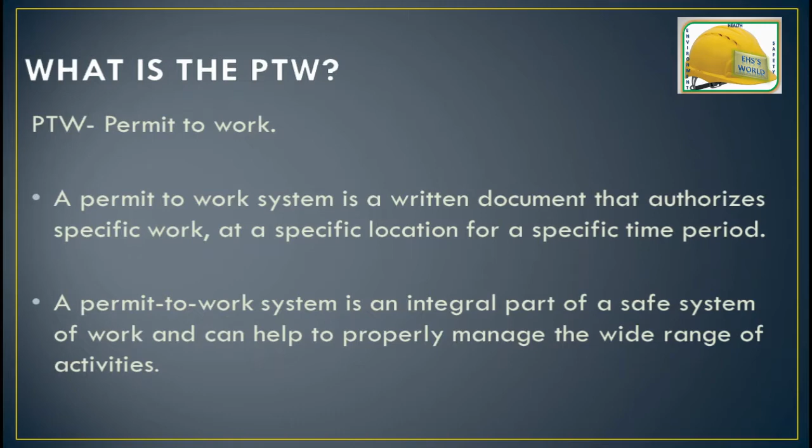Today we will cover permit to work. What is PTW? PTW stands for permit to work. A permit to work system is a written document that authorizes a specific work at a specific location for a specific time period. A permit to work system is an integral part of a safe system of work and can help to properly manage the wide range of activities.

What is PTW? So there are two parts: one is the issuing authority and the other is the receiver. The issuing authority may be the project manager, site in charge, site manager or site engineer who is responsible for the normal operations within a particular workplace or work site. And who is the receiver? The receiver is a supervisor or team leader of workmen who have to carry out the activity.

A permit to work is not simply permission to carry out a dangerous job. It is an essential part of a system which determines how that job can be carried out safely and helps communicate this to those doing the job. It should not be regarded as an easy way to eliminate hazard or reduce risk. The issue of a permit does not make a job safe by itself. That can only be achieved by those preparing for the job, those supervising the work, and those carrying it out.

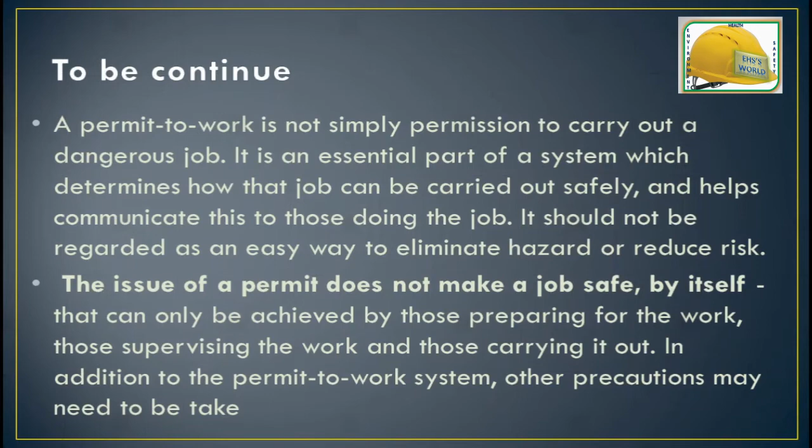In addition to the permit to work system, other precautions may need to be taken. A permit to work system is a formal recorded process used to control work which is identified as potentially hazardous. It is also a means of communication between site management, plant supervisors, and operators and those who carry out the hazardous work.

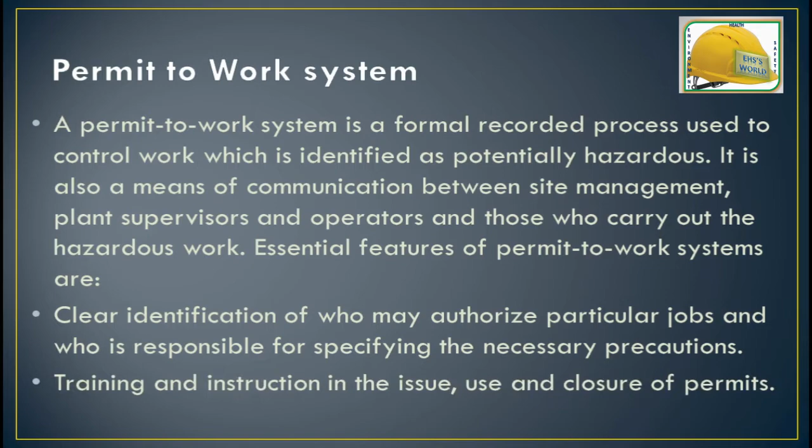Essential features of a permit to work system are clear identification of who may authorize particular jobs and who is responsible for specifying the necessary precautions, and training and instruction in the issue, use and closure of the permits.

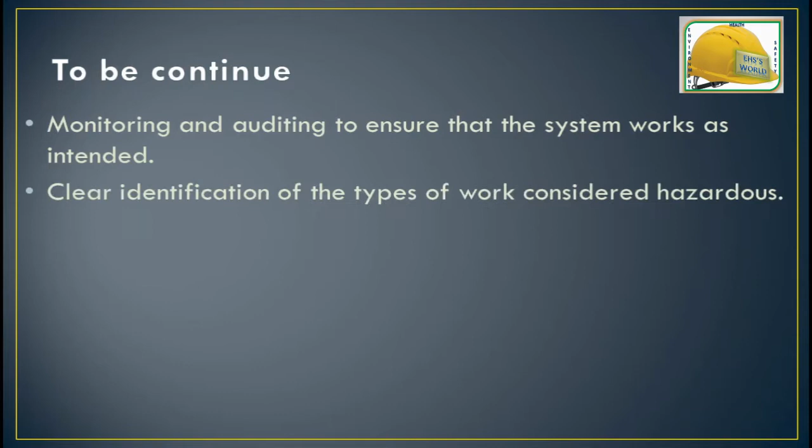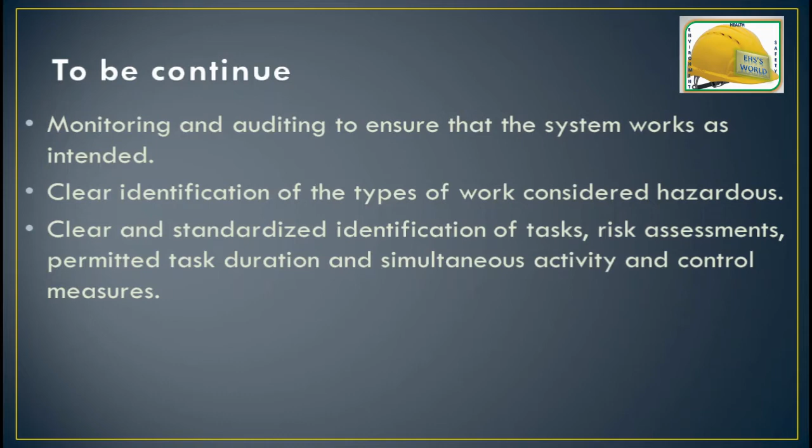Monitoring and auditing to ensure that the system works as intended, clear identification of the type of work considered hazardous, clear and standardized identification of task, risk assessment, permitted duration, and simultaneous activity and control measures.

A permit to work system aims to ensure that proper consideration is given to the risk of a particular job or simultaneous activity at site. The permit is a detailed document which authorizes certain people to carry out specific work at a specific site at a certain time, and which sets out the main precautions needed to complete the job safely.

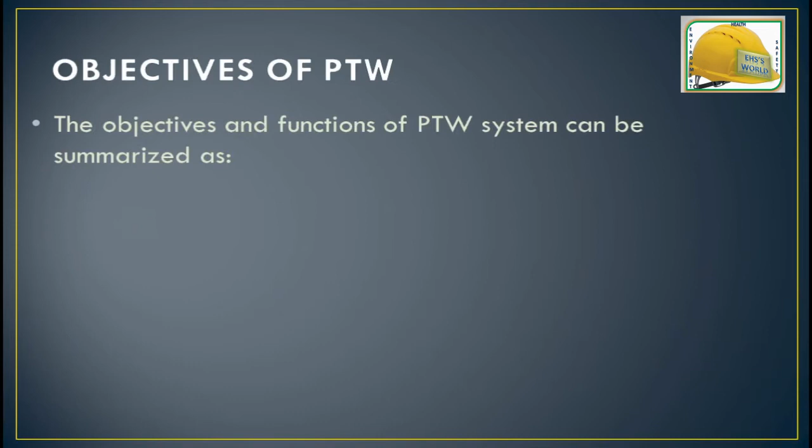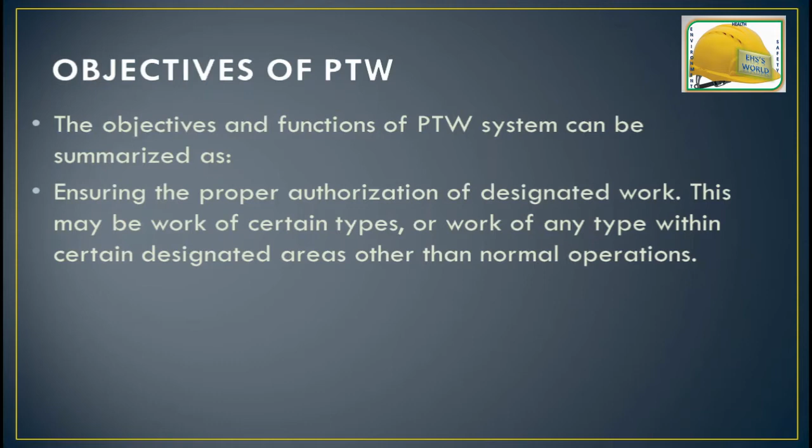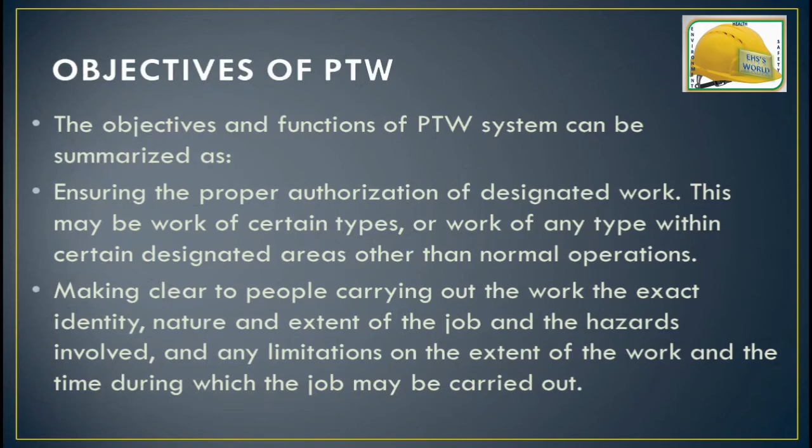Now we'll cover the objectives of PTW. The objectives and function of the PTW system can be summarized as ensuring the proper authorization of designated work. This may be work of a certain type or work of any type within a certain designated area other than normal operation. It makes clear to the people carrying out the work the exact identity, nature and extent of the job, the hazards involved, and any limitations on the extent of the work and the time duration in which the job may be carried out.

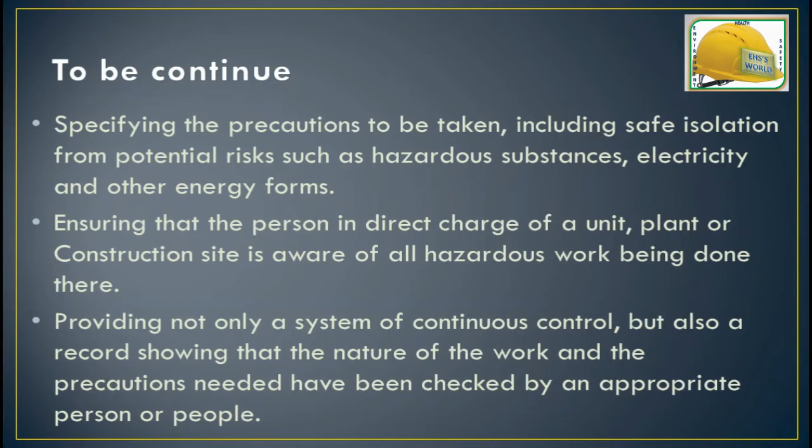It specifies the precautions to be taken, including safe isolation from potential risks such as hazardous substances, electricity and other energy forms. It ensures that the person in direct charge of a unit, plant or construction site is aware of all hazardous work being done there, providing not only a system of continuous control but also a record showing that the nature of the work and the precautions needed have been checked by an appropriate person or people.

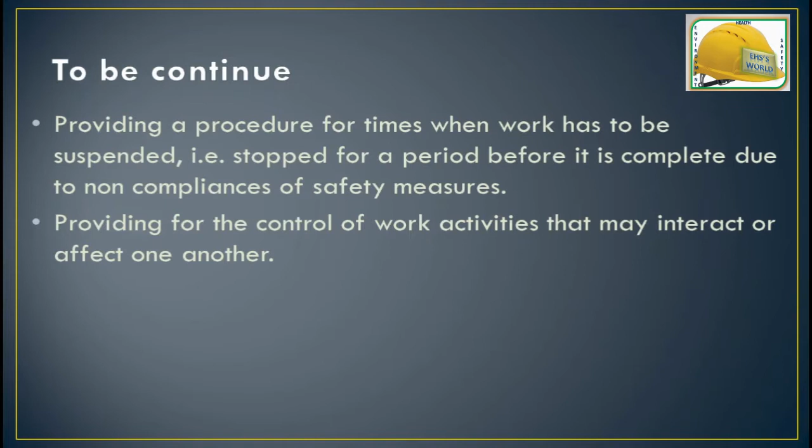It provides a procedure for times when work has to be suspended or stopped for a period before it is complete, due to non-compliance of safety measures, and provides for the control of work activities that may interact or affect one another.

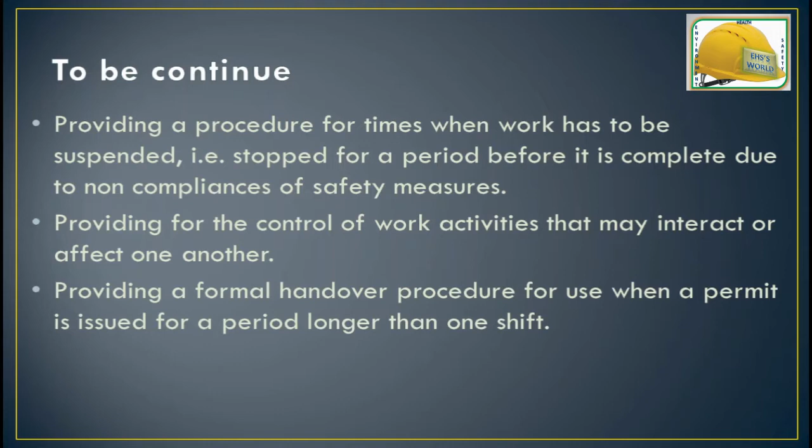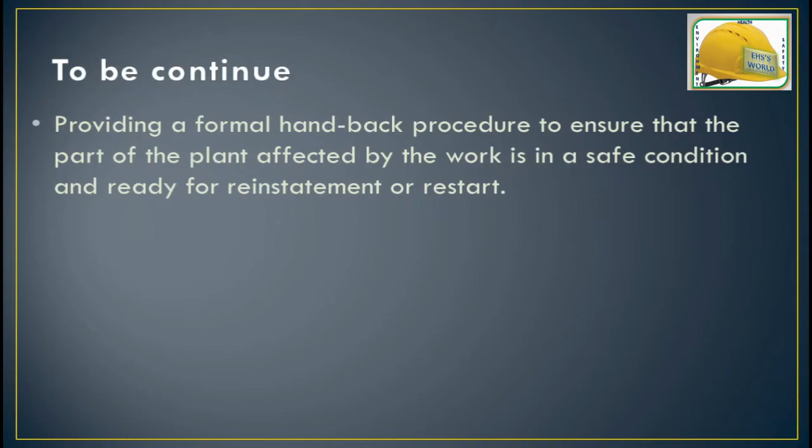It provides a formal handover procedure for use when a permit is issued for a period longer than one shift, and provides a formal handback procedure to ensure that the part of the plant affected by the work is in a safe condition and ready for reinstatement or restart.

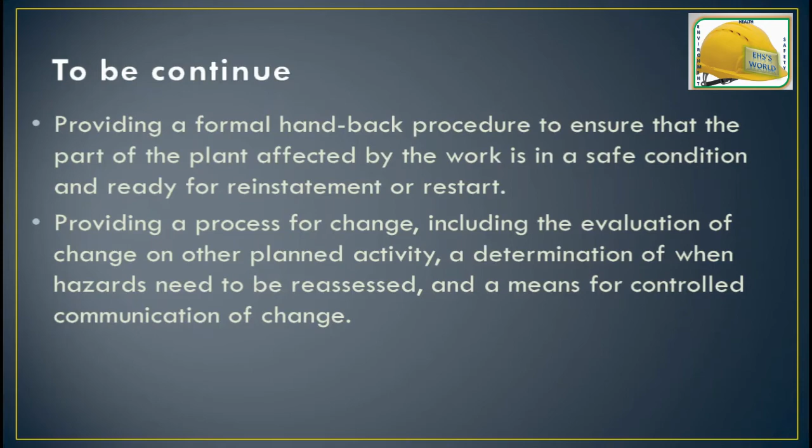It provides a process for change, including the evaluation of change on other planned activity, a determination of when hazards need to be reassessed, and a means for controlled communication of change.

Next we'll see when a permit to work system is required. The permit to work system should be considered whenever it is intended to carry out work which may adversely affect the safety of personnel, plant, or the environment. However, the permit to work system should not be applied to all activities, as experience has shown that their overall effectiveness may be weakened.

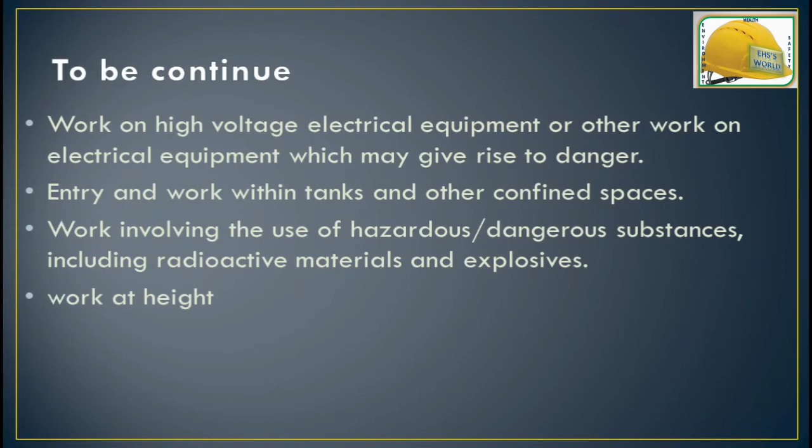Work of any type where heat is used or generated, for example welding, flame cutting, grinding, etc., work on high voltage electrical equipment or other work on electrical equipment which may give rise to danger, entry and work within tanks and other confined spaces, work involving the use of hazardous or dangerous substances including radioactive material and explosives, and work at height. So these work require the work permit system.

Now we'll focus on the type of permits. Hot work permit, cold work permit, work at height permit, confined space entry permit, high voltage electrical isolation work permit, excavation work permit. So these are the types of work permits.

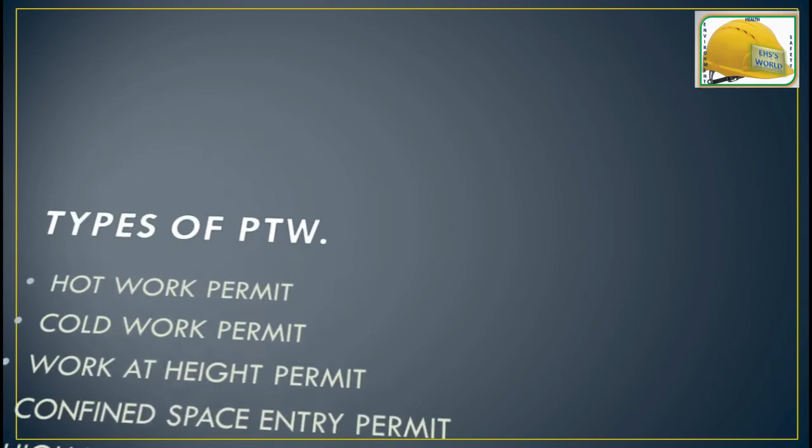So we'll focus on hot work. Hot work is usually taken to apply to an operation that could include the application of heat or an ignition source to tanks, vessels, pipelines, etc., which may contain or have contained flammable vapor, or in an area where a flammable atmosphere may be present. It is generally applied to any type of work which involves an actual or potential source of ignition and which is done in an area where there may be a risk of fire or explosion, or which involves the emission of toxic fumes. They are normally used for any welding or flame cutting work, or for the use of any tools which may produce sparks.

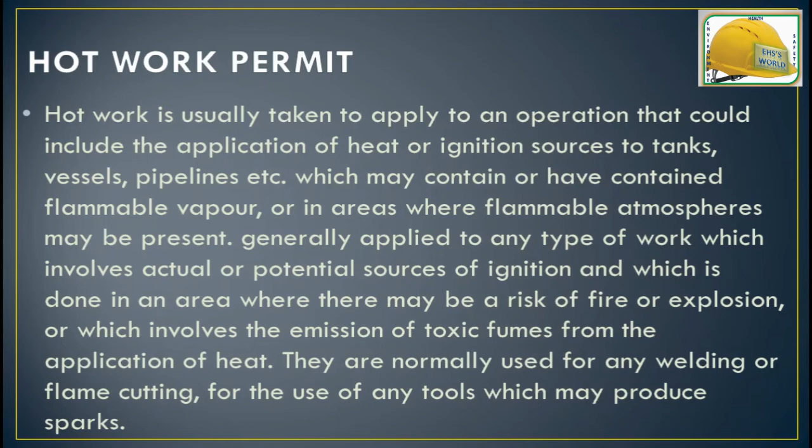Next we'll see cold work permit. Cold work permits are frequently used to cover a variety of potentially hazardous activities which are not of a type covered by hot work permits. The activities for which a cold work permit may be appropriate will vary from site to site, but should be clearly defined.

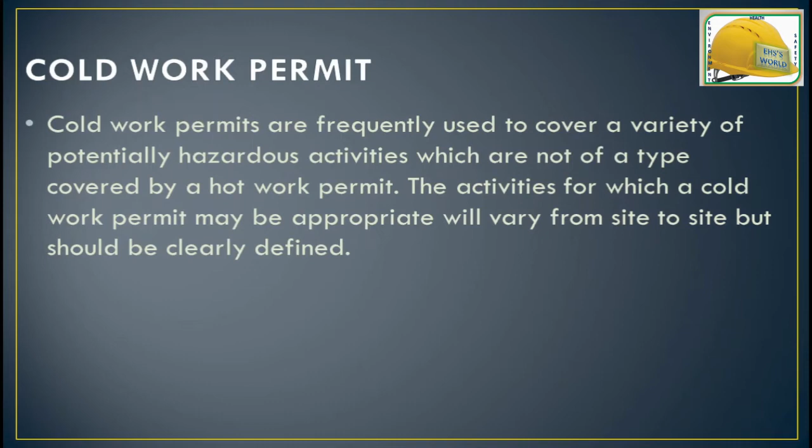Next, we'll see electrical work permit. An electrical permit to work is primarily a statement that a circuit or item of equipment is safe to work on. Permit should not be issued on equipment that is live.

Next, we'll focus on confined space entry permit. Confined space entry permits are used to specify the precautions to be taken to eliminate exposure to dangerous fumes or to an oxygen depleted atmosphere before a person is permitted to enter a confined space. The permit should confirm that the space is free from dangerous fumes or gases.

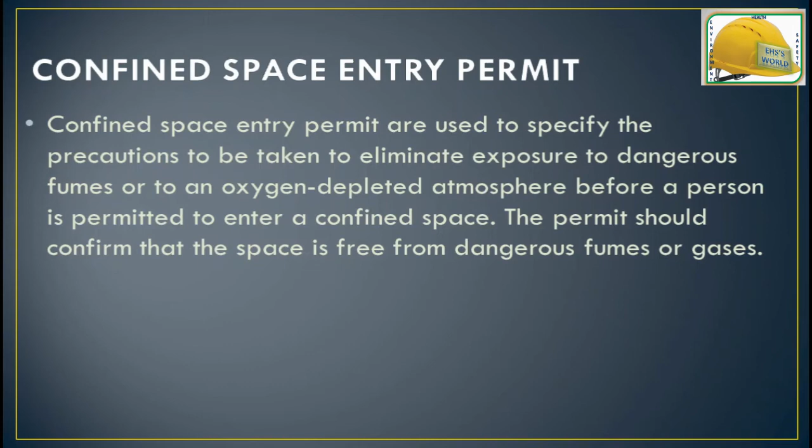Next we'll see excavation work permit. It will typically be required wherever any digging, excavation, or boring has to be done, to ensure that no underground utilities, services, or pipeline work will be affected.

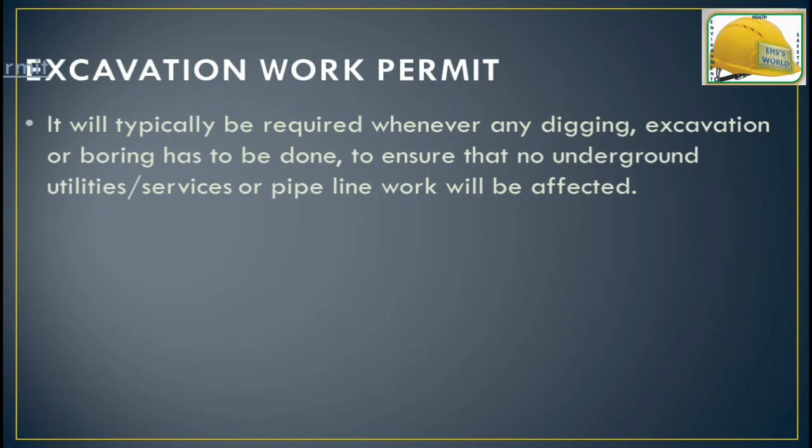So here I am going to show the simple format of a work permit. Here you have to mention the name of the company or organization. This is the format number. Every HSE format has its own number.

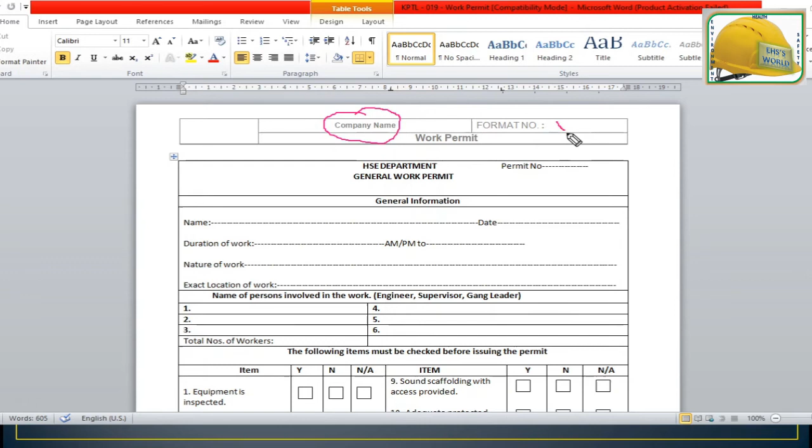Here, permit number. So every permit has its own number, such as if you are going to issue it in the month of July 2020, you can put the permit number as July 2020-01. Here, name of the receiver, date, duration of work such as 9 a.m. to 6 p.m., nature of the work such as gas cutting or welding, and exact location of the work.

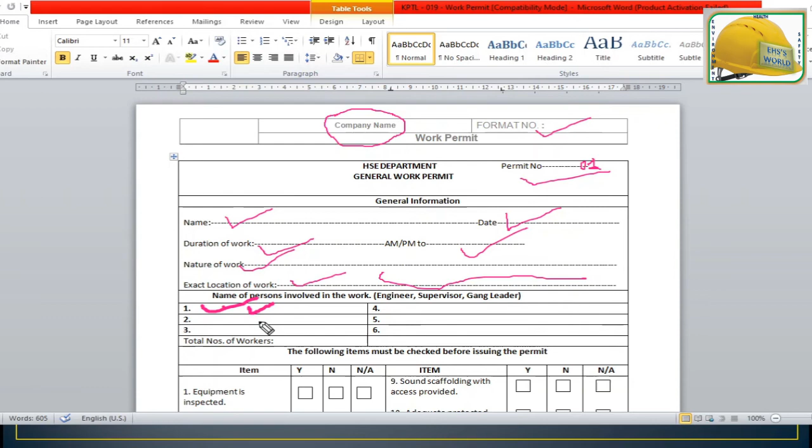You have to mention the exact location of the work. Next is the name of the persons involved in the work. Here you can mention the name of the engineer, name of the supervisor, name of the workmen or gang leaders, and the total number of manpower including the supervisor.

Next is the following items that must be checked before issuing the permit. These are the checkpoints, such as: the equipment is inspected, all workers provided with PPEs, power hand tools used at height are connected to a 30 mA ELCB, and proper lighting provided.

So each checkpoint must be checked to ensure all the safety measures are in place before the start of the work, such as safety net provided. So all the safety measures should be implemented.

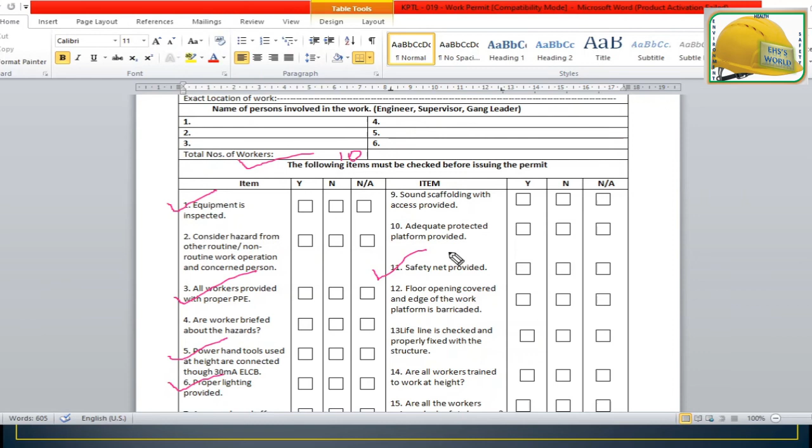Special instruction: the permit must be available at the work site at all times. Location and description of work must be clearly indicated by the permittee. All precautions given in the permit must be strictly adhered to by the permittee.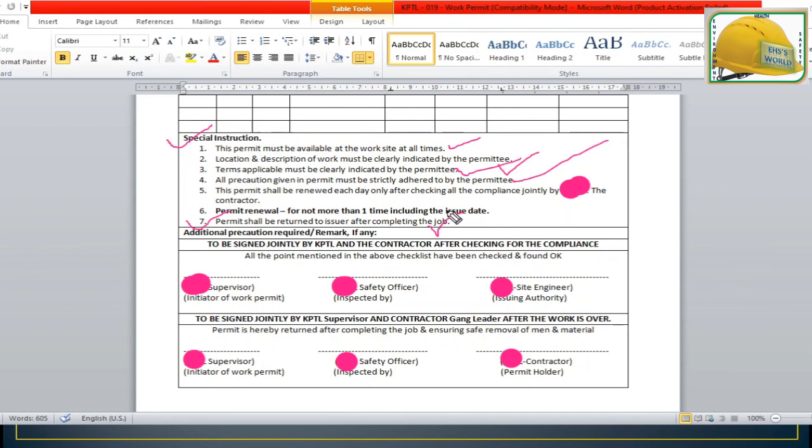The permit shall be renewed each day only after checking all the compliances jointly by the site engineer and safety officer. Next, the permit shall be returned to the issuer after completing the job. So when you complete the job, the permit must be closed and returned back to the initiator of the work permit, supervisor inspected by the safety officer, and authorized by the site engineer and site manager.

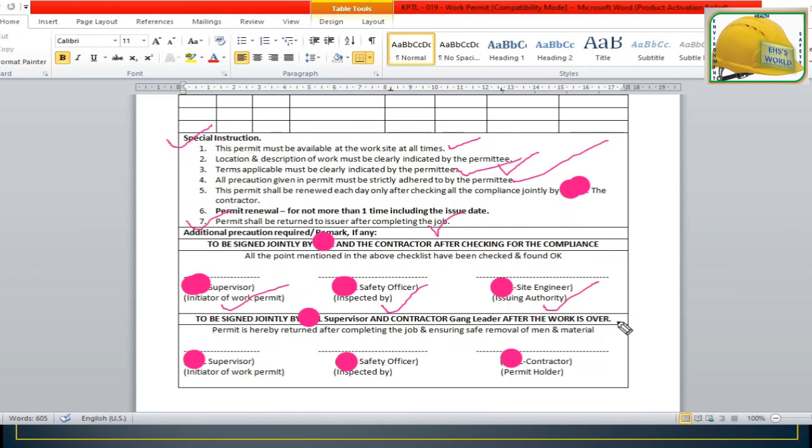The next section is the closing procedure, to be signed jointly by the supervisor and contractor gang leader after the work is over. So the initiator of the work permit has to sign jointly with the safety officer and permit holder. The permit holder also has to sign and close the permit.

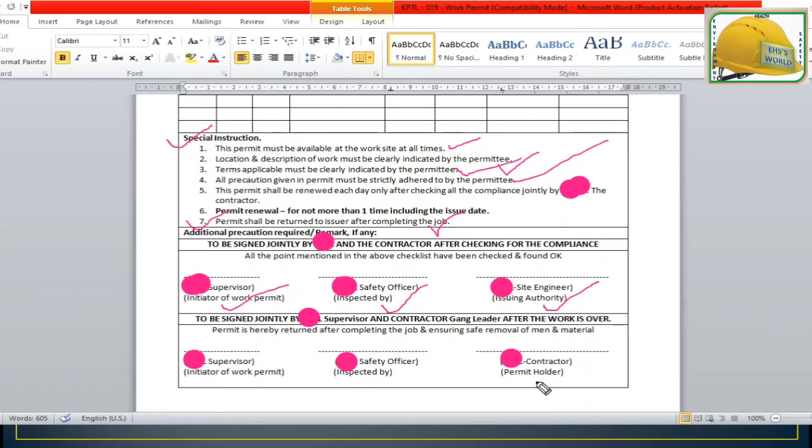So this is the simple format of the work permit system.